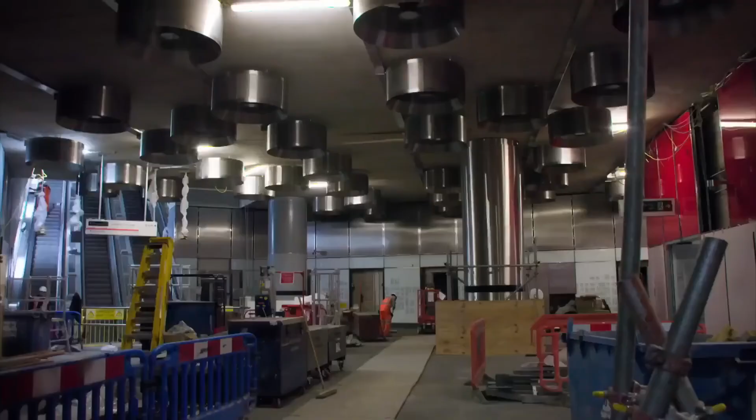Under the heart of central London, this team of technicians is getting ready to undertake a critical test. I'll be up as soon as I can. They plan to power up, for the very first time, the biggest station on the brand new Elizabeth Line railway that is being built beneath the city. This is an enormous milestone, and a huge amount of work has gone into making this happen. With the £15 billion railway already behind schedule, they need this test to run without a hitch.

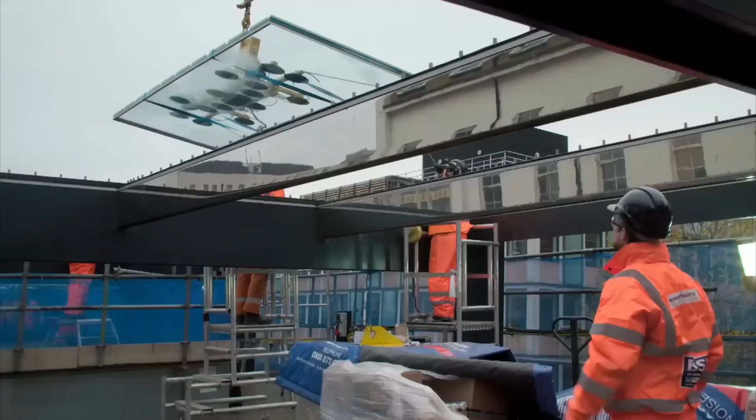Switching now. 3, 2, 1. Now, with mounting construction delays having postponed the railway's launch by almost a year to autumn 2019. We don't need these problems right now. We follow the teams working on borrowed time to complete its next phase. We've got an incredibly tight deadline to work to. Fitting out the stations.

If you damage a listed building, it could be up to a prison sentence. Powering up the line. No power, no trains, nothing. And it's an absolute intense battle to get this over the line. Oh my God. This is the exclusive next chapter of the race to build London's the Elizabeth Line, formerly known as Crossrail.

Hi, Simon. Hi, Leeling. How are you doing? Really good to see you. Thank you for coming round.

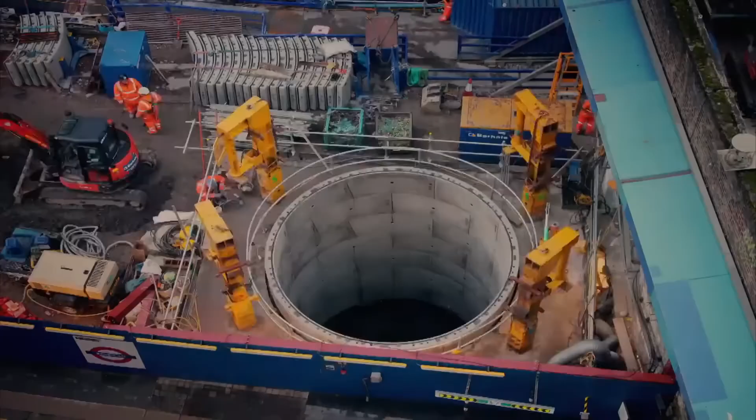How's it going? The Elizabeth Line is the biggest construction project in Europe and London's first new underground railway for 20 years. We've got the last 5% of install to be done, and that's really complicated. Yeah. Nice and steady, inches at a time, please, mate. But after 9 years of construction, the project is in trouble. Just 14 weeks before passenger services were due to begin in December 2018, its engineers were forced to postpone the line's opening by almost a year.

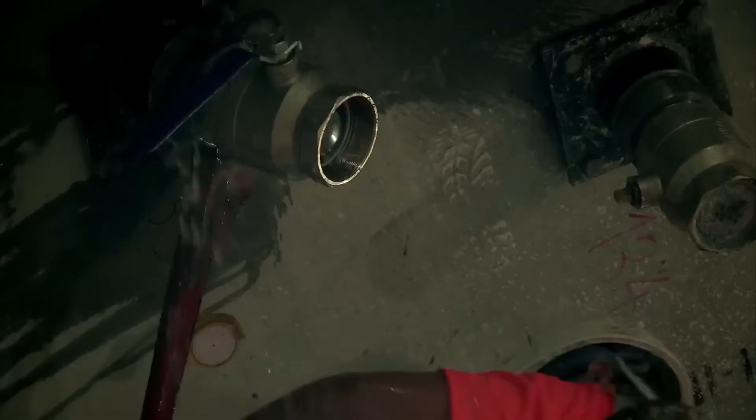Welcome to our westbound. With the new opening deadline now set for autumn 2019, Crossrail CEO Simon Wright faces an ambitious challenge to get Britain's embattled flagship engineering project back on track, to prevent further delays and limit costs from spiralling out of control. You can imagine we've been working extremely hard, 24/7 literally, to reach that opening date, and so it was, you know, enormous disappointment. Any sort of leaks? We do have a leak.

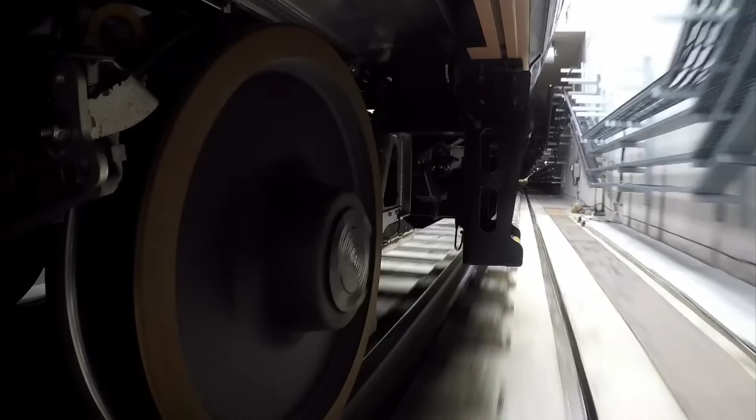The delay was caused by several factors. We've had delays finishing off the stations with mechanical and electrical systems. These are ridiculously complicated, aren't they? Oh, yes. We were trying to test with incomplete infrastructure. We ultimately found that there was not sufficient time left to do all the testing of the trains to prove that it was safe and that the trains would also be reliable. We've got to deliver and regain that trust and regain those reputations that were so hard won over so many years.

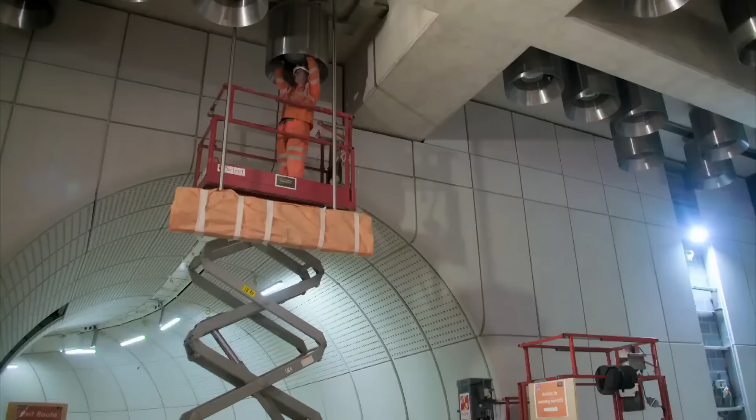To hit their new opening deadline, workers urgently need to complete fitting out the railway. This involves installing the signalling systems, lighting, platform cladding, escalators, and signage, so that technicians can finish testing the trains at high speeds along the full 120-kilometre length of the railway. A single day of additional delay could add up to around £3 million to the cost of the project.

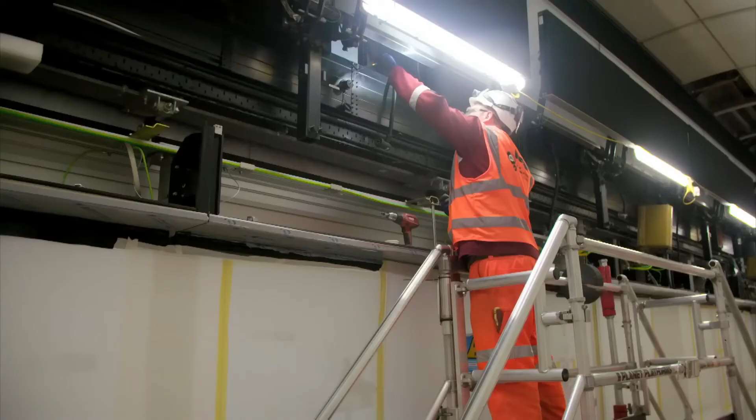Tottenham Court Road is one of the 10 new stations where construction work should already have been finished. Crossrail engineers are working flat out to install one critical element to prepare it for passenger services: power. The big challenge now facing engineers is to plug everything in and switch it on. Put the terminations into the assets there. Project manager Li Ling Hai leads construction and fit-out at this station.

When the public come into a station, they probably don't think about everything it took to make sure that that station operates properly. They don't notice any of the mechanical and electrical systems. For example, that the lights are on, that the escalators are running. We don't expect them to see the work that goes on, but all that work is incredibly important.

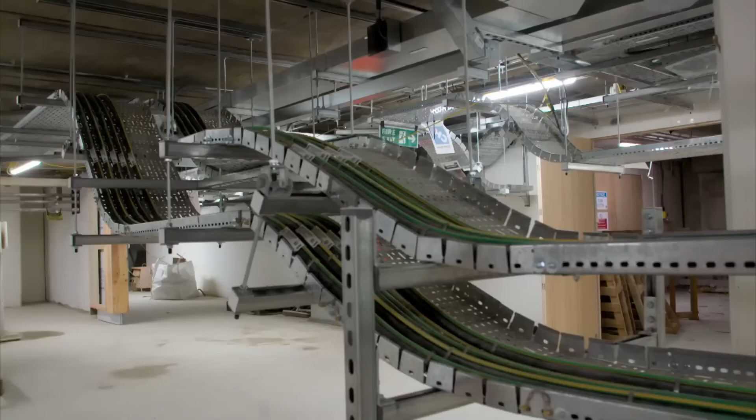It will take approximately 160 megawatts of electricity to run the new Elizabeth line and its stations. Tottenham Court Road Station requires a lot of power to run. It's about the same amount of power that you would provide to about 6,000 to 8,000 homes.

The first electrified London Underground line opened in 1890. The railway stretched 5 kilometres and linked South London to the city. To wire the line up, workers had to pull copper cables through the train tunnels by hand and plug them into a huge generating station. Incredibly, the same strenuous technique is still used today to connect up the even bigger and more complex stations on the Elizabeth line.

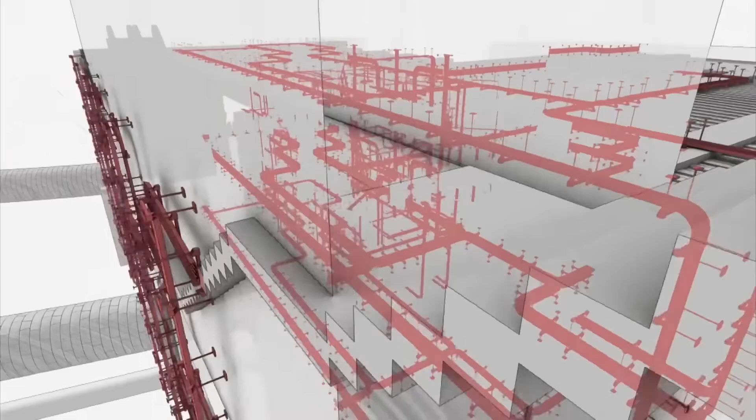Tottenham Court Road Station has more than 100 kilometres of cable, and each one of those cables needs to be fed by hand. No cables, no equipment, no station. Li Ling's team need to thread an intricate network of more than 100 kilometres of cable inside the new Tottenham Court Road station. These will power everything from ticket machines and gates to the lifts and escalators.

But with the station almost built, pulling so many cables through this labyrinth of walls, tunnels and ceiling cavities will be a challenging feat. The longest and heaviest of all the cables is the main power supply line. This vital artery powers the station's ventilation systems. Engineers must weave this 2-ton cable by hand, right through the station, down through 3 floors, and into the main switchboard room where it will need plugging in. The slightest snag or kink in the cable could sever one of its wires and trigger even more delays to the railway's opening.

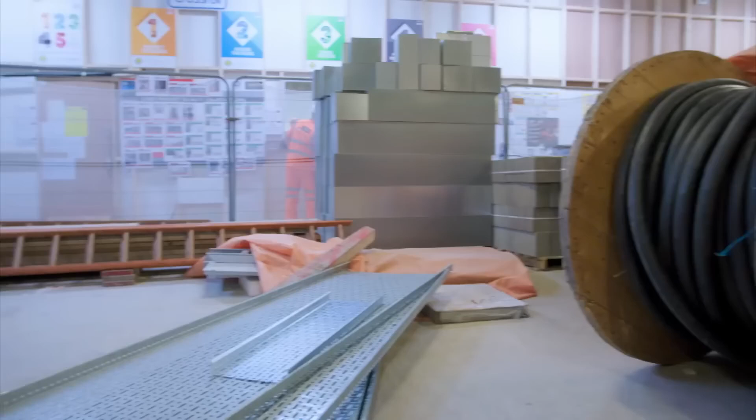Cable pulling can be really physical because while some cables are very thin and the size of your bootlace, other cables are huge, fat cables that require large amounts of physical labour. Oh, Manjit, how's that scaffold going? It rests on the shoulders of East End electrician Sean Thompson to wrangle this heavy hauling feat. Right, Bill, Mark. When we get down to -4, I'll have a look.

I've been an electrician for 22 years now. From when I was young, I remember my mum was still just, if you've got a trade behind you, you're always going to have a job, really. Sean's been working on Crossrail for more than 4 years. Crossrail, second to none. We worked on Heathrow Terminal 2. That was similar, but no, nothing like this.

Today, we're pulling in the biggest and heaviest cable that we're using on this project. This is one of the longest runs. It's about 93 metres, which might not sound that long, but the complexity of the run and all that means it's not the easiest to do. It's 18 kilograms every metre, so not easy to shift. Hauling this 2-ton cable over the distance a sprinter would race will take some Olympian strength.

They've got 5 boys in today from Hartlepool. They're all big and strong. I think they breed them big there. One of them soon is the size of a door. Most cable pullers are from Hartlepool, yeah. We don't use cable pullers from London because they're all soft.

Morning, lads. It's a 185 we're pulling in today, so it's going to be challenging. It's a very important cable, lads, so can't have any nicks on it or nothing like that. I really don't want to be taking this one back out again, and neither do you. Sean's team will need more than brute strength to guide this heavy-duty 93-metre-long cable through the maze of walls, cavities and shafts that lie ahead. Their secret weapon? This steel guide sock that grips the front end of the cable so they don't lose it in the walls.

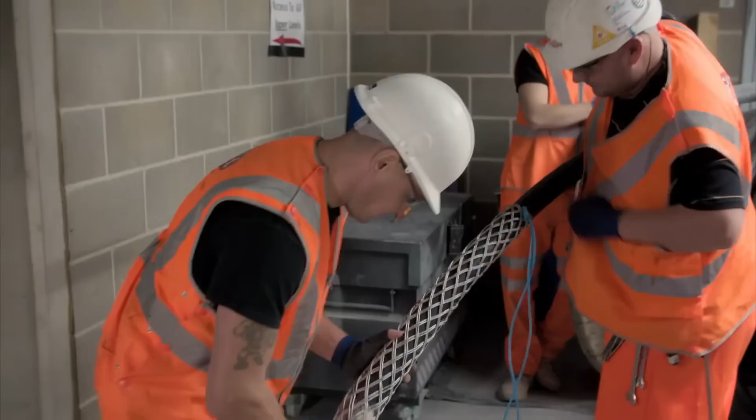Best description of it is like a Chinese finger trap. The harder you pull, the more it contracts on that cable, so it won't ever come off. Ready? Hold. Again. Hold. Hold. The team position themselves evenly along the length of the cable and call a unique chant to help pull in unison.

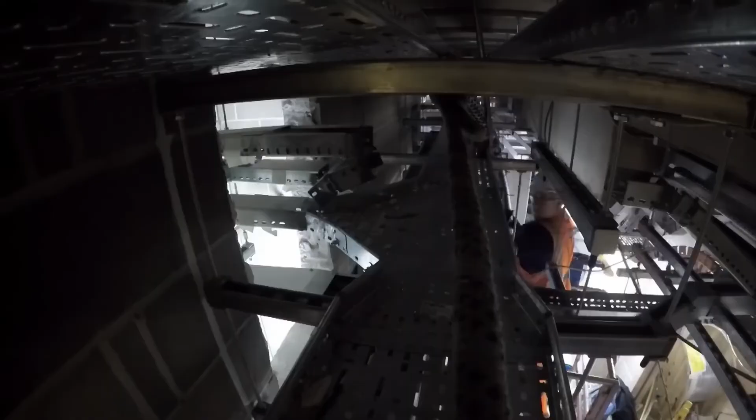It's a cable puller's call. We call it a mating call. They all have to pull in unison. He calls out, they all know to pull at exactly the same time. If you pull at the wrong time, people stand back and all that. It's very important in what they do. The actual call itself, I don't think they've changed it since they started pulling cables way back in Victorian times.

With the cable just 6 meters into the 93-meter pull, they hit a snag. Not going, not going. Looks like the cable's got stuck in the corner. Just too tight up there. Just fingers crossed now, getting it around this corner. A metal bar is blocking the path of the cable. Just pulling against this bar all the time.

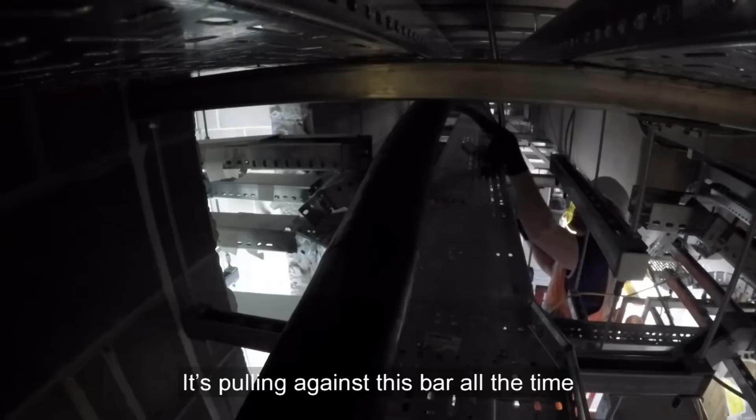That was like a break. It's challenging places, but some places it opens up and it's easier. What's up there? Nightmare. They move the metal bar out of the way and heave again. There you go. Up.

But it's not long before they hit the next pinch point, a 3-story tall shaft that leads directly into the switch room. It's not coming down, that, mate. It looks good on paper, then when you try and put some big cables to it, obviously it doesn't work. You have a nightmare. The cable's got stuck again, and I think the lads are getting quite frustrated about it now.

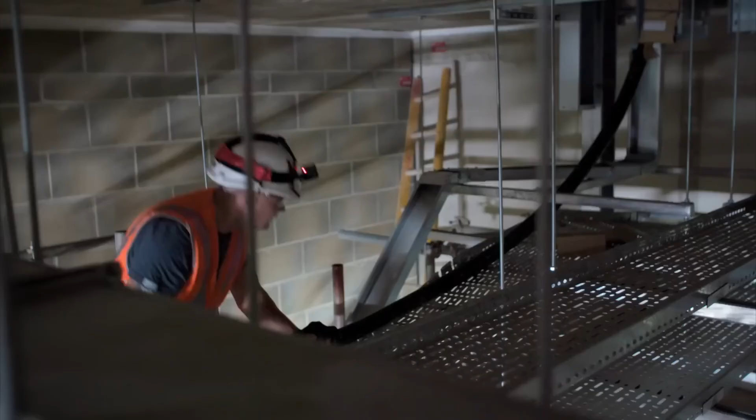Two stops west, the countdown clock is ticking for workers to finish one of the most ambitious new stations on this section of the line. It will allow Elizabeth Line trains to plug directly into Isambard Kingdom Brunel's iconic Victorian terminus at Paddington. 35 million passengers use this station every year to connect to mainline, underground and airport trains.

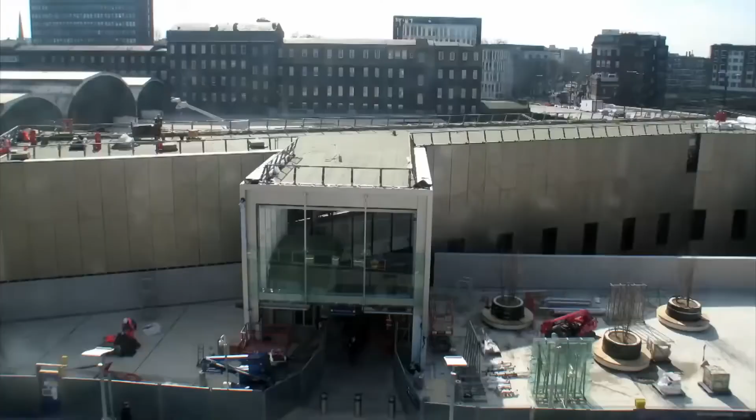6 years ago, the new station here was little more than a hole in the ground, held open by 1,000-ton steel supports. Today, its ticket hall is lined with ornate bricks, and a new additional entrance has been built to welcome its 70,000 passengers a day. Once complete, this will be the most significant transformation to Paddington for over a century.

The construction work here is causing huge disruptions for local businesses, with a year-long delay to the line's completion set to cause even more misery. The problem is all the main entrance of the station has been closed. Many people cannot come in and visit us because it's a long walk. We had to find different ways to survive. We start serving breakfasts in order to pay the bills and to pay our staff. Otherwise, we just go bust and that's it, finished.

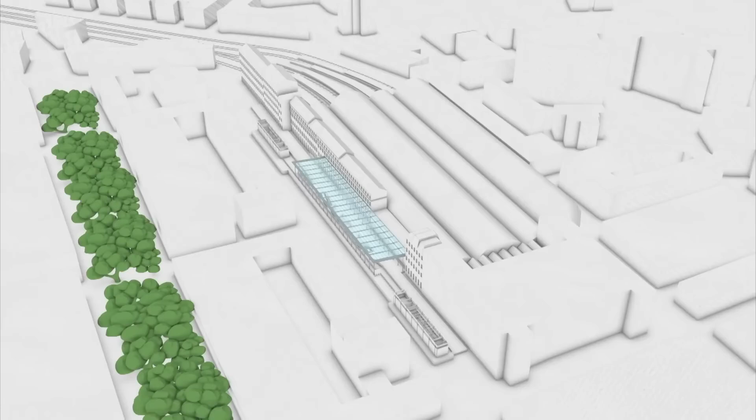But hopefully when this thing is concluded, maybe we have more customers. We've got businesses around us to keep happy. We've got a lot of work ahead of us to get it all complete. To end disruption and finish the new station here, Cynthia's team must now top out the construction with a great glass canopy. It will stretch 120 meters long and 18 meters wide.

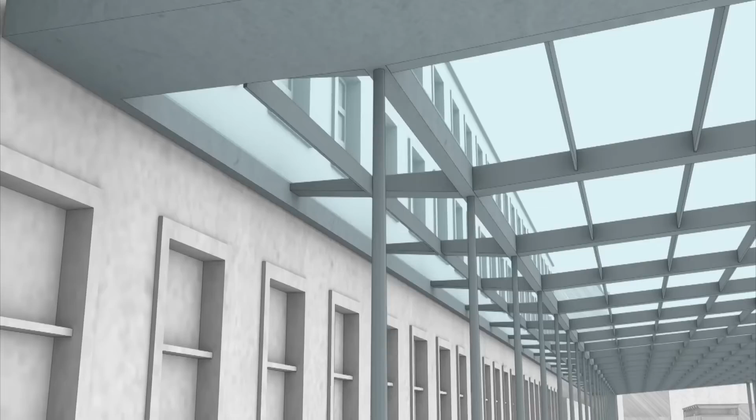340 tons of prefabricated stainless steel columns and beams make up the canopy structure. 220 one-ton panes of triple glazed glass slot inside the frames. These will allow light to flow uninterrupted right down to the platform level. To make the construction work even tougher, workers must erect this 4,000-piece steel structure just 4 inches away from Macmillan House, a Grade 1 listed building. A single scratch or knock could incur heavy penalties on the team.

If you damage a listed building, it could be up to a prison sentence, so we don't want any damage to the building next to us. This is the most constricted site I've been on. You all know why we're here today. The first column's being installed for the canopy. When the loads are coming over, don't want anyone anywhere near it. You know, don't go underneath it, keep well out of the way until it's safely in the hole.

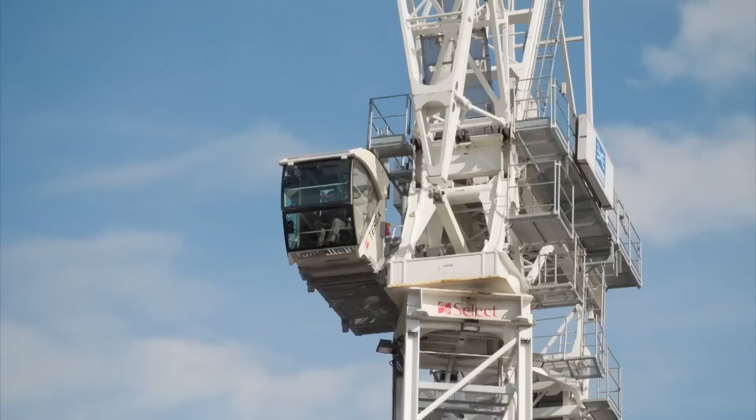Jib down a bit more for me, please, Leighton. When you're lifting, you think everything can go wrong. You're only as good as your last lift, because your next lift could be an accident, near miss, fatal. So if you think of the worst, you count for everything. Go up nice and slow, please, mate. Are you ready up on top? I'm ready, yeah. It's on its way to you. The crane operator and ground team must remain focused. Going up nice and easy for me, Leighton. Any lapse in concentration and the column could hit passing traffic or crash into scaffolding, taking the entire deck with it.

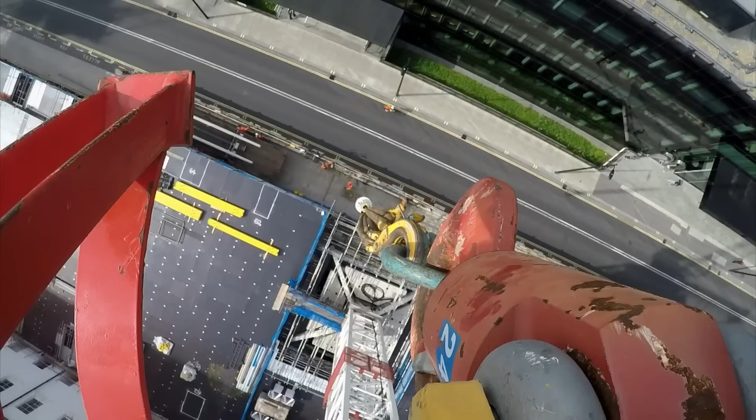Slew round to your left a bit so Flonnie can get that tagline, please. Lovely, the tagline is with me now. Keep coming to them. Keep coming. Keep coming down. Nice and clear. Keep coming down as you were. Nice and slow.

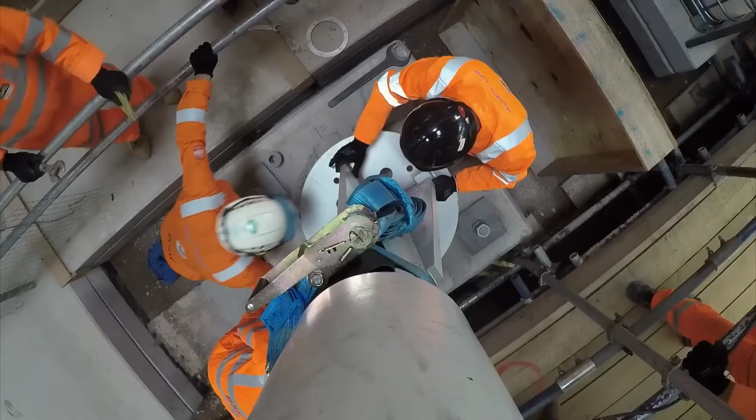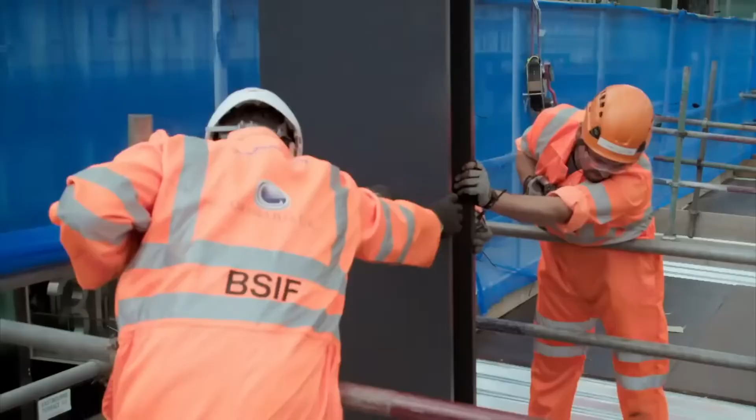All stop, all stop. Now they have the first 6 columns in place. Swinging in this 22-meter-long rafter will take nerves of steel. Installing the rafter up against Macmillan House, we have about 4 inches, roughly. It's a tricky installation. OK, Leighton. Nice and slow for me, mate. Oh, well. Let's just hope it fits.

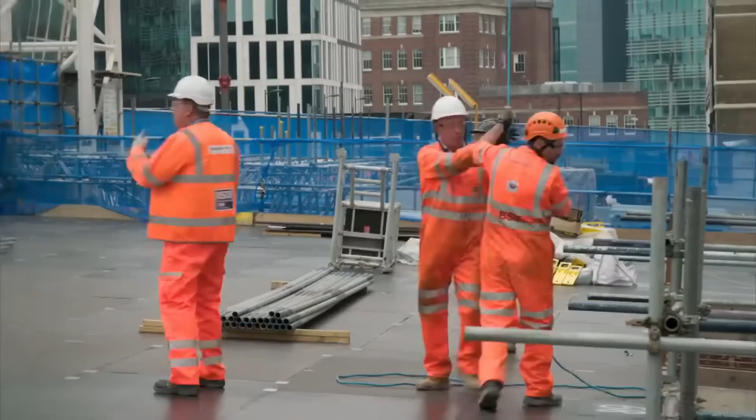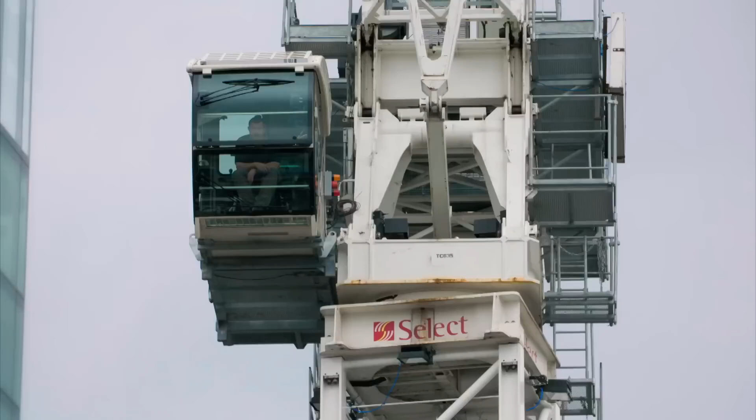Nice and easy. Nice and easy, mate. Oh my gosh, it's close. Oh. Yeah, pretty tight. It's in. The rafter's looking good now for welding, so should be good to tack it in place. He went very well. Fabulous crane driver up there. And he has what I call touch of an angel. Everyone's got a bit of a sense of relief now that the first rafters are in. Now just another 20 more rafters to go.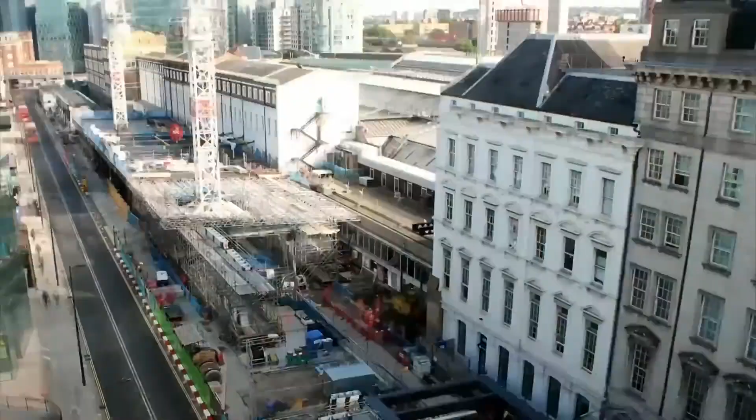With 130 more tons of steelwork and the glass roof to install, Cynthia's team must work around the clock to stand a fighting chance of completing the canopy in time for the railway to open. One stop east is Bond Street, London's luxury quarter. This playground for the rich and famous is home to Europe's most expensive shopping street, attracting 200 million visitors each year. The new station here will be a vital gateway to the area, expecting over 130,000 passengers every day.

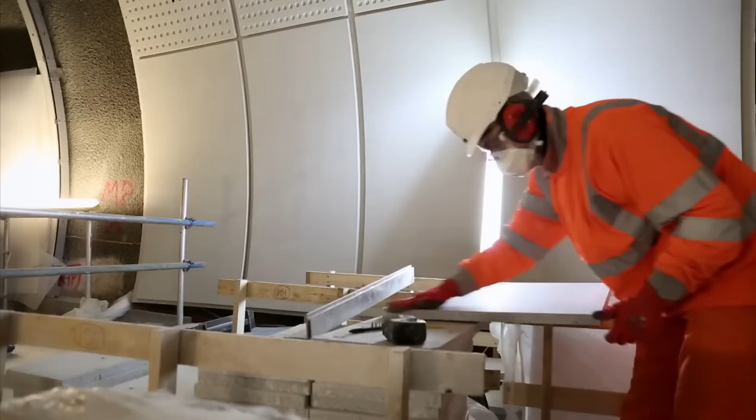Work began on this site in 2010. Engineers excavated 302,000 tons of earth to make space for the underground station and poured 100,000 tons of concrete to line the walls for its ticket halls. Today, most of the flooring, wall cladding and lighting may be installed. But construction work here is running up to 6 months behind schedule. And there's one crucial piece of machinery that's still missing. The station's escalators.

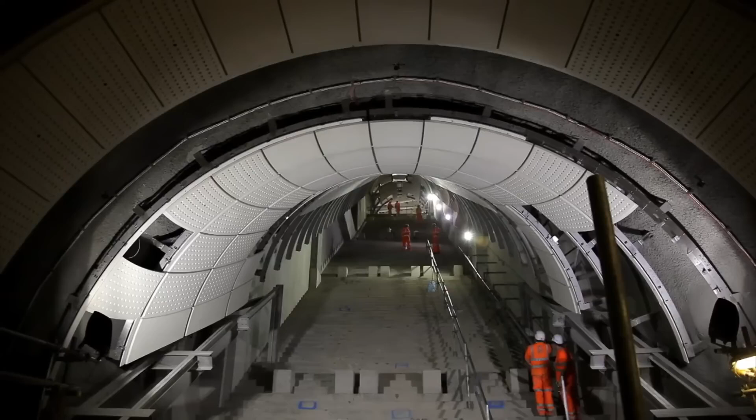Ollie, Megan, call back. Ollie. 30-year-old Australian engineer Tim Wean is supervising the installation of 3 huge escalators into this station to connect the entrance at road level down to the platforms. Spanning 65 meters, these escalators will be the longest on the Elizabeth line. It's mind-blowing, the size and the scale of the project. I guess because of the size, it brings up a lot of challenges.

I've always sort of had a passion for engineering and construction, even since I was a little kid playing with Lego and sand in the backyard. So to be here is a little bit of a dream come true, really. It's Europe's largest infrastructure project, and it's great to be a part of it. The escalators are an essential tool to maintain the steady flow of people through stations.

The first escalator on the London Underground opened in 1911 at Earl's Court Station. It was made of wood and powered by an electric motor. The novel contraption attracted 18,000 people eager to try it out on its first day. Even though dresses were torn and fingers pinched, it proved an instant success. Thousands of people will be using these escalators every day. Without the escalators, there'd be no station.

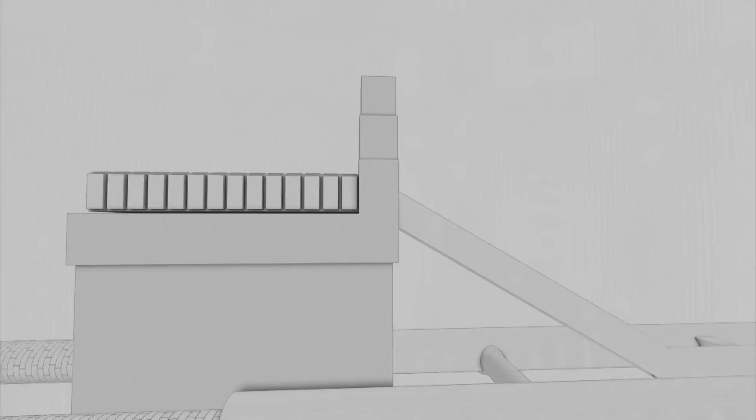The 3 escalators at Bond Street will connect the Eastern Ticket Hall at street level to the train platforms 28 meters underground. Installing them will be a formidable challenge. Each escalator is 65 meters long. Too long to slide into place in a single piece without hitting the ticket hall roof. So Tim's team planned to separate each escalator into 13 pieces. The smallest section will be 5 meters long, but still weigh 2 tons.

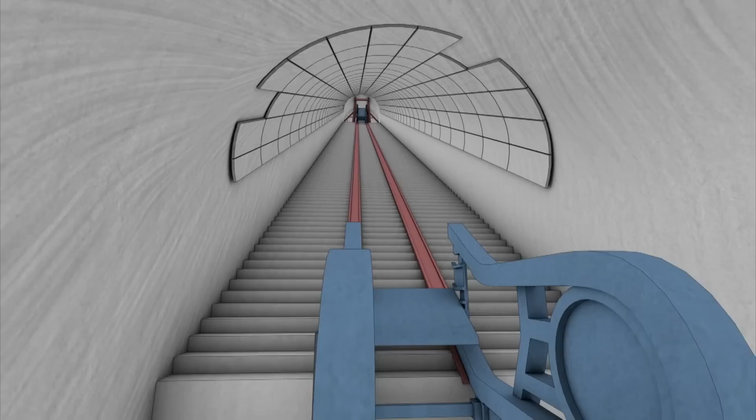The team must carefully winch each section down a 30-degree angle incline, lined with steps on a set of tracks like a roller coaster. It will take great skill and coordination to control these unwieldy pieces of metal as they lower them down this passageway into place. So one of the biggest challenges we've got here at Bond Street is getting the escalators to site. They're trucked from the factory through the heart of London, and they need to arrive on time, ready for us to install.

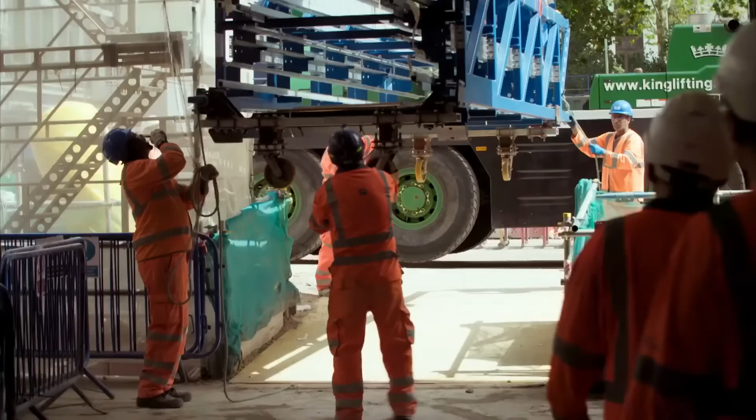Tim's worksite is hemmed in by luxury apartments and boutique businesses. It's taken the team 9 months to plan the complex logistics of this operation. But the constant stream of monster deliveries like this is a relentless nightmare for this area's discerning residents. The day-to-day problems are lorries coming along and closing the road off, stopping parking outside, just the dust and the pollution from it all, the noise. Hello? Obviously, that kind of disruption is not cool if you're trying to do someone's hair and they're trying to relax. What are we doing?

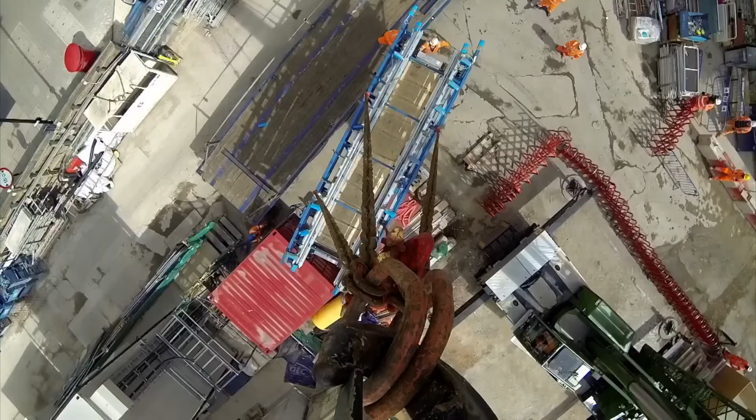A lot of work goes on behind the scenes to ensure we're minimising any disruptions to our neighbours. So this goes in the building first? Huge moment for the team to see the first escalator arrive. It's all systems go now.

They're on wheels, but they're still 7+ tonnes, so they are movable, but they're very heavy, and it takes a lot of guys to manoeuvre them. A full escalator is 13 truss units, and we can fit 12 in this ticket hall at any one time due to the space. If there is a glitch and we're not installing at the rate we need to, we'll have to turn the trusses away, which will ultimately delay station opening. So, mammoth task ahead of us.

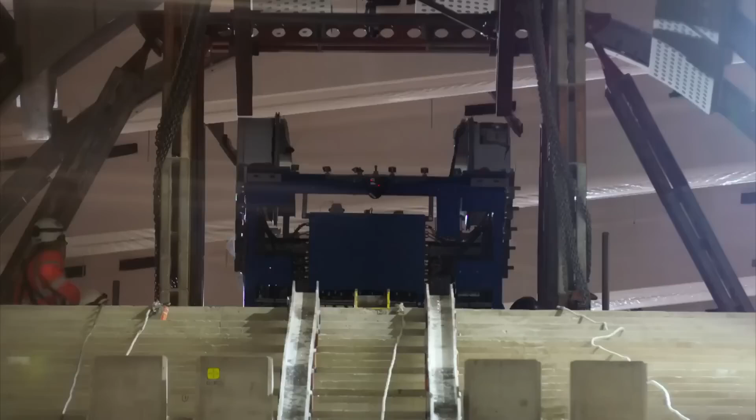The first section is generally the hardest because A, it's the heaviest, and B, it's got the longest distance to travel. So that one section needs to travel from top to bottom, and once that section's in, the rest should just fall into place. That's the rocket, yeah. Walk in. Right. You all right there, boys? You're all clear. Out you go.

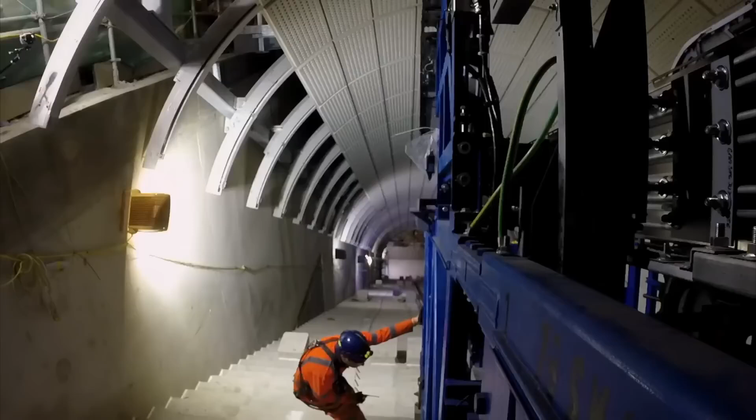This winch cable is all that stops the first 7-ton escalator section from sliding out of control as they attempt to abseil it over the edge and down the steep incline of steps. It's a heavy piece of gear. There's a lot of weight on it. Just as they get going, the wheels jam in the tracks. Yeah, the wheels need to be a bit tight.

The guys have to make sure the wheels are straight and sort of jostle the wheels into position and make sure they're running straight down the track. Balancing on the steep slope of steps, they wrestle the wheels back on track. And get the escalator moving again. Good, yeah? Yeah. The first truss section is about halfway down now. A few hiccups at the top, but hopefully it's smooth sailing from here on to the bottom.

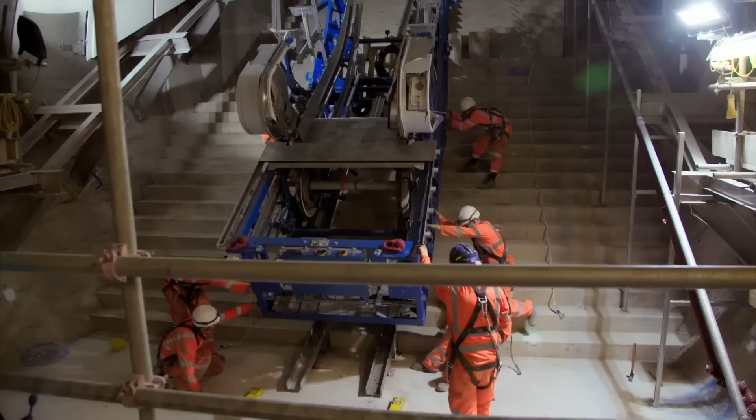Good news, the first escalator truss has reached the bottom. It's very satisfying to see this progress. It's been years in the planning, so very satisfying to see the first section in. But as Tim's team hoist the second piece down into position, they hit another glitch. The second section has come in, and for whatever reason, it's not aligning properly. Nowhere near it. We don't need these problems right now. Yeah, it's still quite far. I think we will have to take this on.

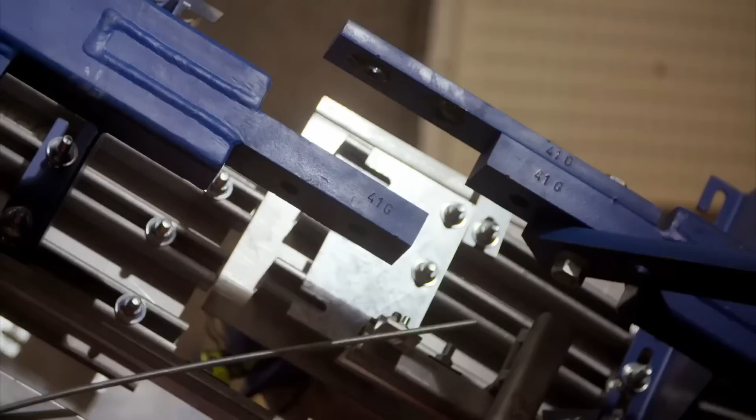The issue we've got is these escalators were designed and built over a year ago. Between that time and now, we've had to alter this floor level to suit some drainage, which has meant that the first and the second truss sections don't align. Guys will have to jack this section up another few hundred mil, and they weigh 7 tonne each section, so it's going to be quite difficult to lift them up and to do these alterations. This is also going to add some time that we don't have.

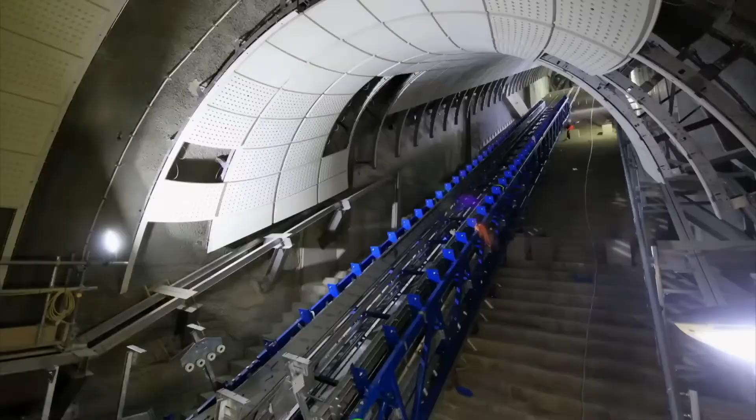Yeah, all clear. Inch down. And again. That's it. Lovely. We managed to get the two sections together. There's a lot of blood, sweat and tears, but happy days it's in. Now we've got the remaining 11 sections to go in, and hopefully we can claw back the lost time. Tim's team now need to push through the night to get the escalator assembly back on track.

East at Tottenham Court Road Station. Obviously, we can get access and get this cable out the way on -1. Sean and the team are battling to thread a crucial 93-metre-long power cable through the maze-like station. They've hauled the 2-ton cable down 3 floors, but now it's jammed on the corner of the shaft that leads into the station's switch room. Just above the tray, you've only got like that much clearance. And it's just like wedging against everything up here.

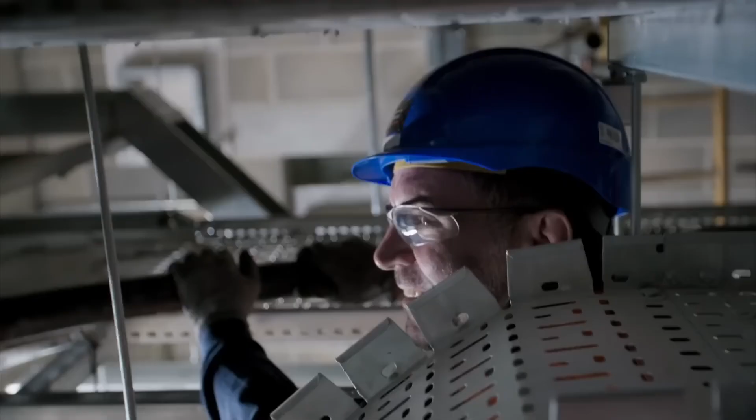The team squeeze a roller underneath the cable to help ease it round the corner. Try again. These corners. Oh, that's better. To make up for lost time, Sean rolls up his sleeves to haul with Big Al and the boys from Hartlepool. They're always getting me to do this. Just helping out a little bit, made it a bit easier for them. I'm out of breath.

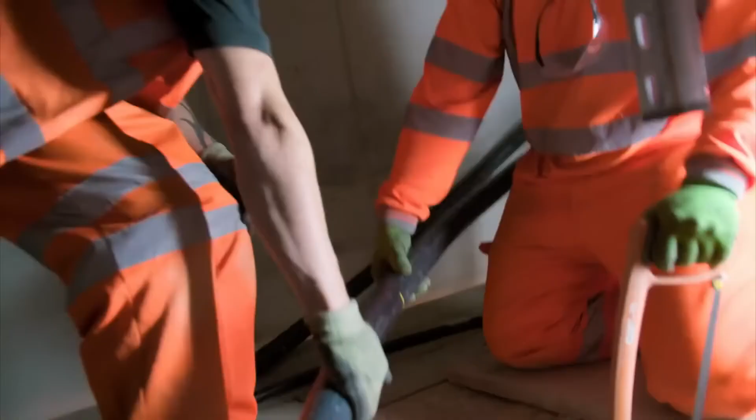That's it down here! With the cable end finally in the switch room, it's time to plug it in. To do this, they must slice through the cable's outer casing to expose the inner wires. It's the moment of truth for the team. If they cut the cable too short, or any of the 148 wires inside are damaged, they must rip the whole cable out and start again, which could further delay the beginning of passenger services.

Hopefully it's been measured perfectly. If it isn't, obviously, the cable's coming back out. It's very much like a surgical procedure. Can't cut too deep. Obviously, can't cut too shallow. Has to be bang on. There's absolutely no room for error. It's obviously a very tense moment for me and the lads because this is the biggest cable that we're pulling in. It really has to be right.

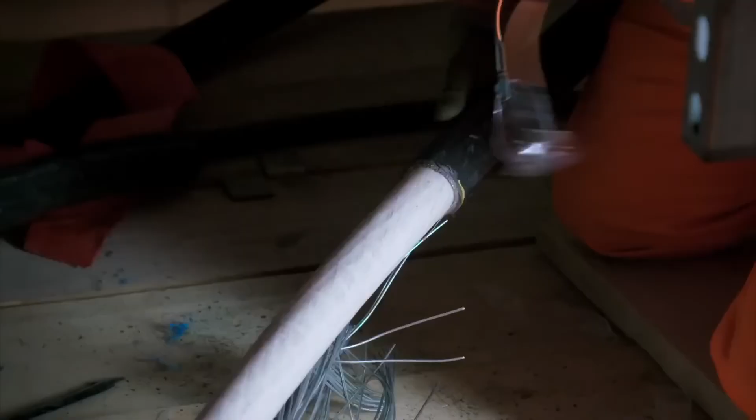Yeah, a bit of a moment of truth now. Everything's bang on there. The cut's good. Obviously, won't be completely relaxed until it's in the top of the panel. I know it's long enough. Right, hold. Hold that. How's it going, mate? Going all right, looking good up there. That's it. Perfect, mate. Well done. It's gone in like a dream.

With the cable firmly in place, they can plug the wires into the switchboard. But they'll only know for sure if their extreme wiring is flawless when they turn on the station's power switch. You sometimes expect a few little mishaps, but the lads have done a blinding day. Got a few more cables to put away here, and then it'll be ready for the big switch on. Won't be no bangs, hopefully.

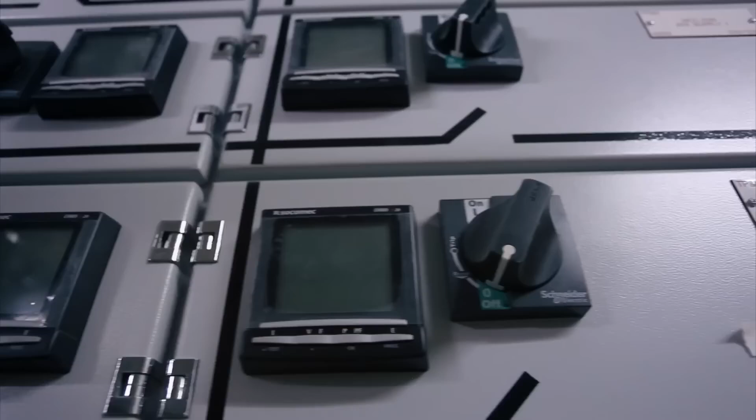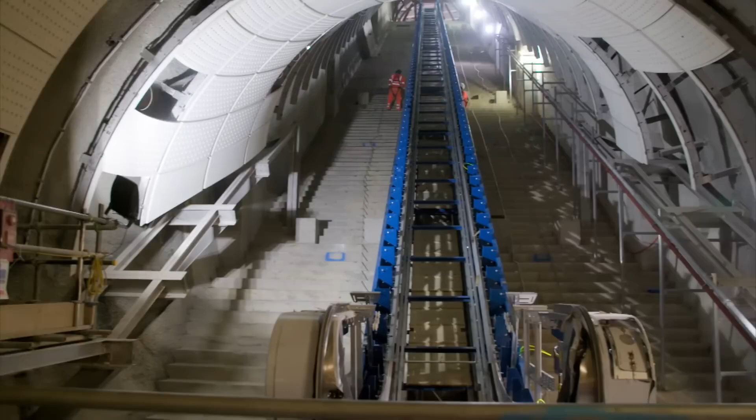At Bond Street, Tim's team have been working night and day to assemble the first 65-metre escalator. The first escalator's been installed, and luckily it fits. It's very satisfying to see the first full complete escalator in. But this is just the initial stage of this colossal installation job. The next step of the process is the slide, which opens up new challenges. Tim's team now has 2 more escalators to squeeze into this steep, narrow passageway.

To make space for escalator number 2, they need to connect winches to the top and bottom of the first escalator and slide it to one side, inch by inch. But this won't be easy. If they slide one end of the 45-ton escalator faster than the other, the extreme stress could bend or break its frame. The key to this successful slide is making sure everyone's on the same page, the top crew in constant communication with the bottom crew, making sure that we're sliding in unison. Sonny, are you ready? All good, boss, all good. We're about to start now. 1, 2, 3.

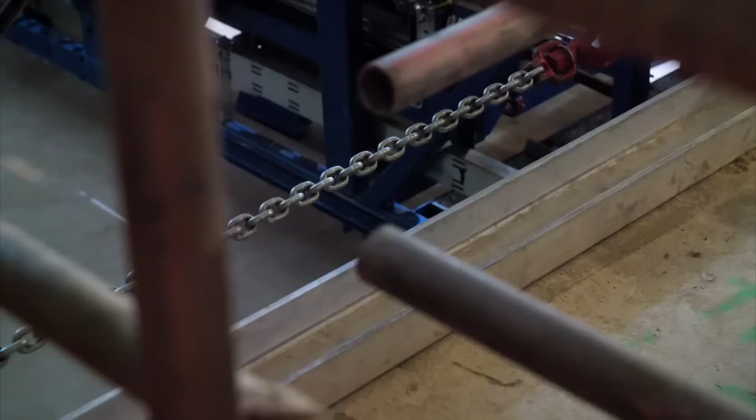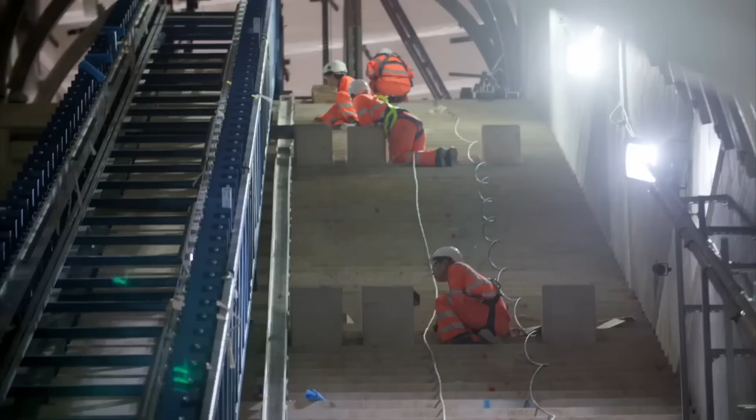As the escalator inches to one side, it veers off course. It's not straight. Stop, stop, stop. You've cleared the bottom track. It's like the top hasn't moved. The issue we've got is the top's not sliding as fast as the bottom. So the risk there is the escalator can twist and it can also catch on the top or the bottom concrete walls. The escalator's 65 metres long and we're dealing with millimetre clearances, literally 1 to 2 mil here and there, so it is very tight.

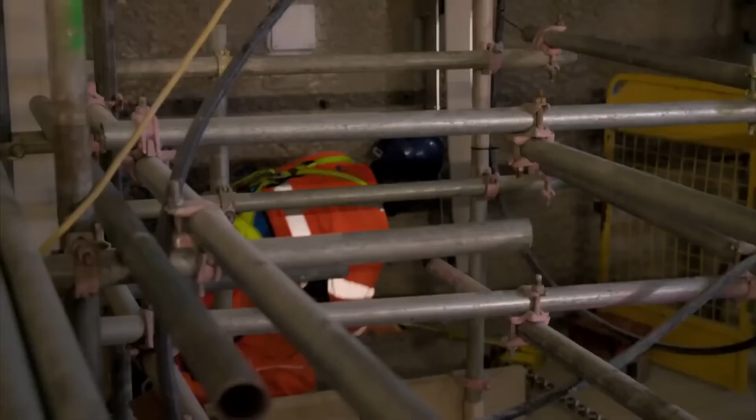The pressure is on the team at the top to haul this 45-ton giant back into line. We've had the bottom team stop their winching while the top team winch a couple of extra notches and catch up to the bottom team. A bit more, please, a bit more. Keep going, Dylan. That's it, like that. Yeah, it looks about right, that. We're back on track now, straight. Right, okay, we're going again then. 1, 2, 3. With the escalator back on course, the team crank it up a notch.

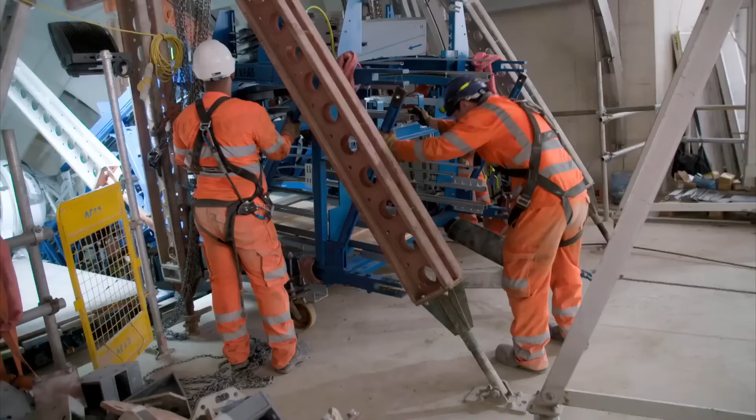Had a few issues along the way, but all in all, it went quite well. Yeah, very happy. It takes Tim's team 6 days and a painstaking amount of muscle power to slot the remaining 2 super long escalators into position. I'm going down. Over there. But the final piece of this mechanical monster will be the trickiest to fit. It's the hardest piece because it's one of the heaviest, and it's a different installation method for this last piece.

Right, is this the wrong stairs? Go forward a bit. Forward, forward. It's not the longest section, but it is the heaviest section. The last section of the escalators contains all the motors and also the drive shaft or the cog that controls the steps. The process of installing the escalator is probably the same as what they would have done years ago. There's no fancy machinery or anything, it's all winches, hoists and manpower.

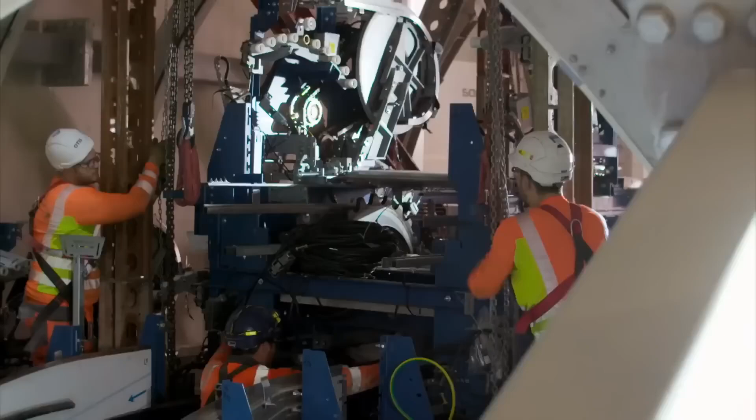All together, down. We've got literally 10 millimetres of clearance between the previous section of escalator and the concrete wall. So it's going to be tight. Keep an eye on the back, yeah, make sure nothing gets caught. Keep it all together, all together.

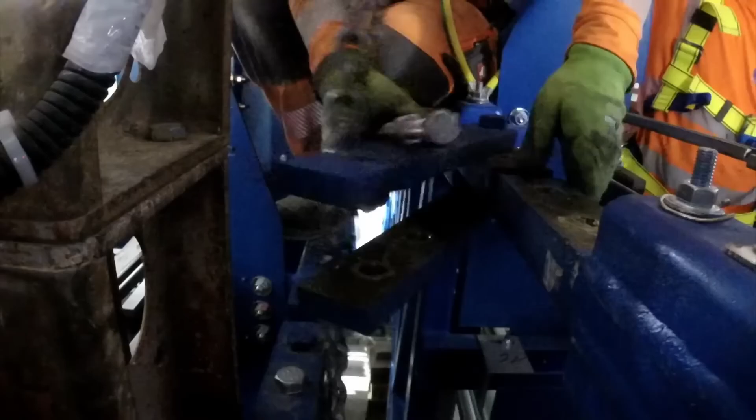With just millimetres to spare, the team squeeze... Almost there, almost there... and bolt the last section into position. Well done, boys. Beautiful. Good job. Very rewarding to see the last section going.

It takes Tim's team a further 12 weeks to install all of the escalator's 771 steps. Bond Street Station may now be closer to completion, but with the flooring, ticket halls and train platforms still unfinished, it remains a long way from being able to welcome its first commuters.

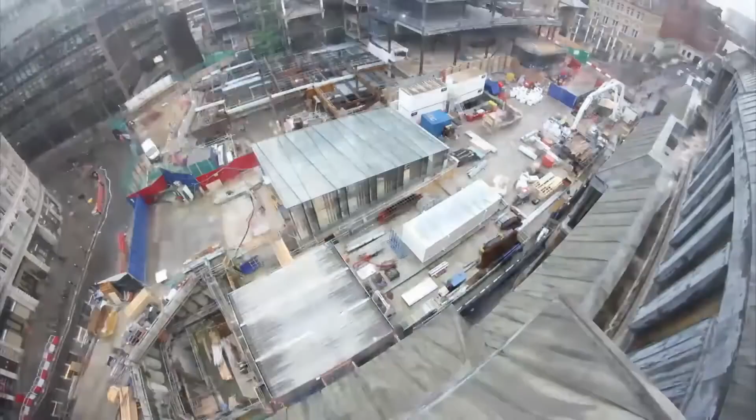Across London, teams are working on borrowed time to finish fitting out the Elizabeth Line stations. It's starting to look increasingly difficult to hit the new opening deadline of autumn 2019. In the tunnels, technicians are battling to complete more than 600 train tests through the railway's underground route. Danny O'Connell leads the team from this secure control centre.

So we have the status of the OHD, gents, please. We have various systems that we need to test. One key component is the signalling. We also test the communications, platform screen doors, power. So it's quite comprehensive, the amount of tests that we need to do.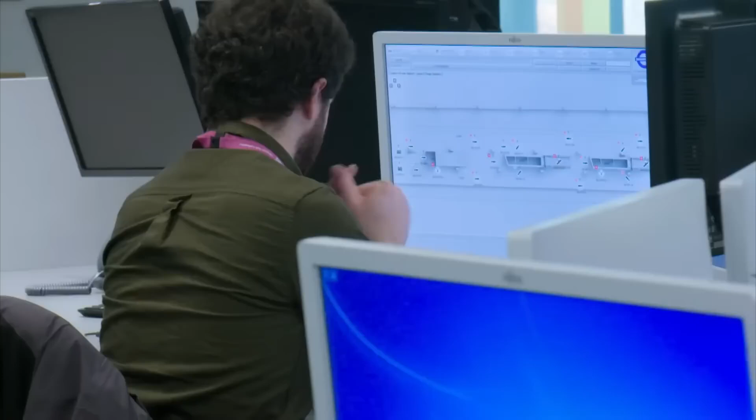The delay to the railway's opening date has given Danny's team more time to run these tests. But with construction work still a long way off being finished, his team is still limited to just a single 48-hour window every 2 weeks, where workers must down tools and clear the tracks to allow the test trains through. A 48-hour window every 2 weeks is a logistical nightmare.

Because these test windows currently are quite short, we need to try to maximise the testing that we do in each test window. Brendan, we just need a confirmation that the route's going to be set from Abbey Wood to Canary Wharf. These test runs include navigating a single train, east or westbound through the underground tunnels, at low speeds of around 5 miles per hour, stopping at one station after another.

Some test windows we complete in 2 or 4 tests. Other test windows, it's maybe 20 to 25. The fundamental system for us is the signalling system. 75% of our tests are based around the signalling system.

With less than a year to go until the railway is due to open in autumn 2019, there are still hundreds more test runs to complete. And these tests will need to gradually increase in complexity. At rush hour, Elizabeth Line operators must be able to smoothly run 24 trains an hour, travelling 2.5 minutes apart through the tunnels to shuttle busy commuters between stations.

But right now, the team has only been able to run one single train at a time through the tunnels. Danny's team have their work cut out to reach the ambitious deadline. Even though the launch date has been pushed back, the pressure's still on us to deliver this railway. Once up and running, it is predicted that Elizabeth Line trains will transport up to 500,000 passengers every day.

310 drivers are being recruited for the new line. That's going to help you. You're going to learn through other people's experiences as well as your own. Rochelle is 30 weeks into the intensive driver training course. Having passed a series of simulated and real train manoeuvres... go gently up onto the train and we'll couple up in the train in front of us... today she faces her biggest challenge to date. Taking one of the new Elizabeth Line trains on a special overground run, carrying passengers.

I kept waking up a few times in the night, not the best night's sleep. I think it was more nerves than anything else. Starting at Shenfield, Rochelle must guide the train 32 kilometres west on a mainline route that runs into the heart of the city and terminates at Liverpool Street Station. There will be up to 1,300 passengers on board, 73 signals, and 16 speed restrictions to navigate. A huge test for Rochelle.

I will have passengers on board the train, so that's where the nerves are going to kick in. Oh, it's a horrible day. Miserable. This is the train to Liverpool Street. Let's do it. Let's get up to 60.

First test, the first station stop. Rochelle must bring the train to a precise halt at a special marker, so all doors of the 160-metre-long train open onto the platform. Give it about 50% now if you want. We'll just bring it down a little bit and we'll just try and roll. You just see my stop car mark coming up. So let it come to a stand and then full brakes.

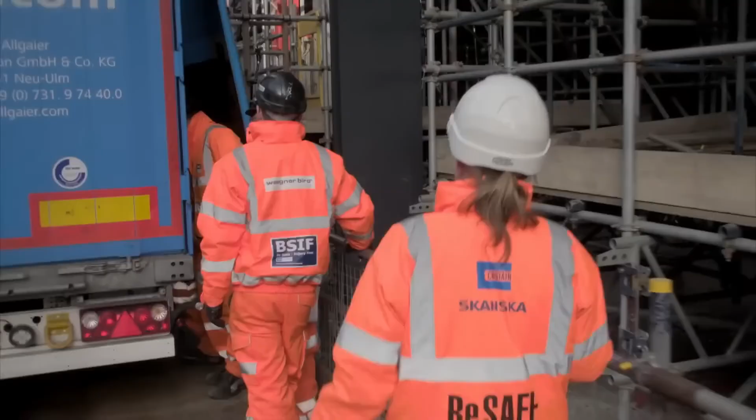West at Paddington, it's taken Cynthia's team 10 weeks to assemble the intricate 4,000 steel pieces that make up the frame of the Elizabeth line's new station canopy roof. Starting to look a bit like a canopy. No, it's okay, stop, it's okay. Is it looking all right? Now they face an even more precarious challenge. It's a very exciting day here on site. We're just hoping that the wind doesn't pick up too much, so we'll be able to lift the glass in.

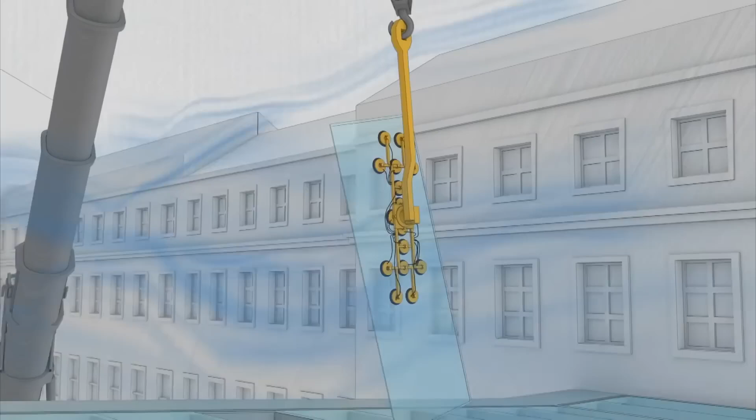Cynthia's team must now carefully install 220 panes of bespoke glass into the steel frame. Each triple glazed sheet weighs a ton and costs around £5,000. The team must use a suction-powered vacuum lifter to hoist every pane into position. They need perfect weather conditions for this plan to succeed. A drop of rain will cause suction to fail, while a gust of wind will toss the pane around like a kite. They must watch each sheet of glass like hawks to stand a chance of installing them all without a hitch, so this station can open on time.

To make the task even more demanding, the team must fit each pane in exactly the right position so that the completed glass jigsaw reveals a cloud-inspired image, one of London's largest ever pieces of art. Every piece of glass is unique because of the artwork that's printed on them. So you could say it's like a giant jigsaw puzzle. They all need to be installed in the right order, in the right place. If one was to break, we'd have to order that specific glass again and then obviously wait a number of weeks for it. Let's hope we get some good weather.

Just as they prepare to lift the first sheet into place, high winds halt work. Oh man, it's definitely picked up. No, there's no way they can control that glass in that. Ian, do you know if the wind's okay or not? One minute we're getting 18 kilometres an hour. Next minute it's 32, so it's up and down at the moment. Oh, okay. It's still okay. It's not blowing over constantly, so yeah. I'm not writing it off yet.

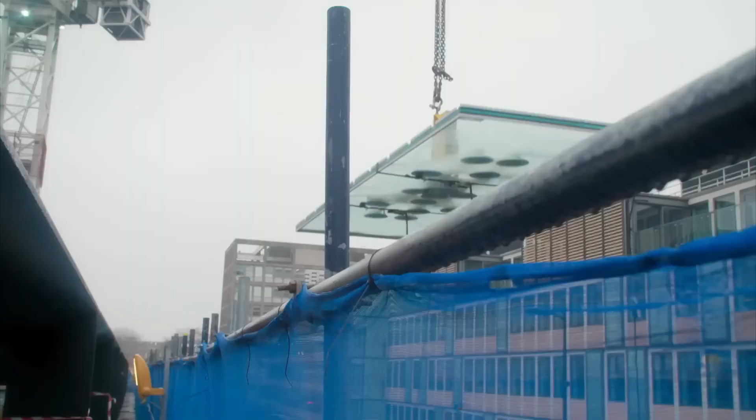Sensing a slight lull in the wind, the team seize the moment. Okay, guys? Okay? Hoist up a bit, nice and easy. They rotate the panel horizontally to reduce the surface area that could be caught by gusts. Up in 3. It takes formidable hand-eye coordination to keep the glass steady in the wind. Which way is it going?

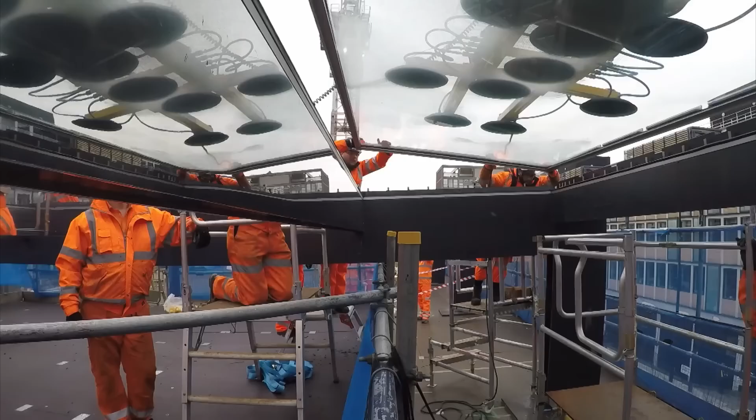Keep coming down, man. Keep it coming down. Finish what? Come down. Oh! Keep coming. Keep it coming. There's more. Okay?

Good job. Good job. First piece of glass is now in place, so yeah, smiles all around now. There's 220 panes of glass altogether, so we've got a lot of work ahead of us. All right, fellas? Over the following weeks, it's looking good. Okay, hold the height now, hold the height.

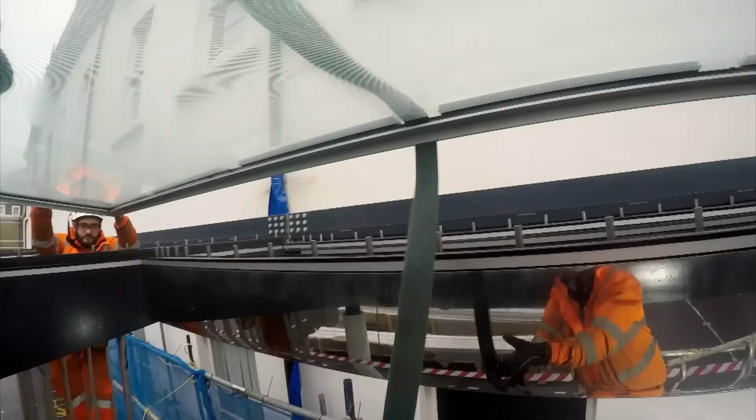Cynthia's team wage a relentless battle against the elements. We're very close to the scaffold level. To install the remaining panels in Paddington's great glass canopy. It's looking good, buddy, it's looking good. You can just start seeing the corner of the canopy just peeking out over there. It is very exciting.

Looks so much bigger than it does on drawings. I think people's first impressions are going to be wow and be really impressed with the sheer size. I'm definitely going to make everyone I know come and visit this and have a look at the canopy.

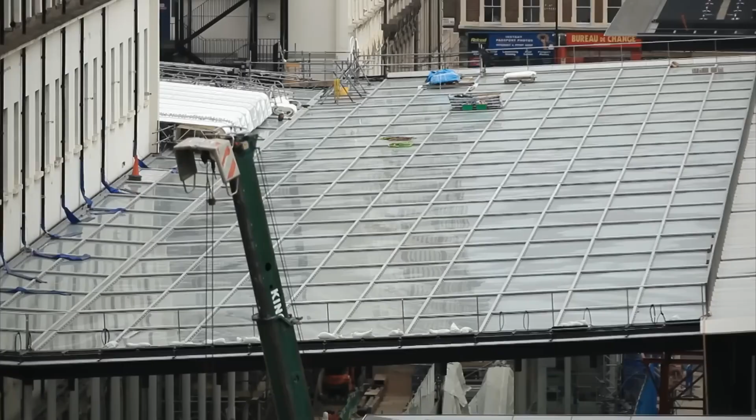Two stops east at Tottenham Court Road, it's a critical moment for Li Ling and Sean as they prepare to switch on the station's permanent power source for the very first time. Permanent power comes with a whole network behind it. If one power supply fails, you've got a backup supply. The whole thing has been set up so that the Elizabeth line should never be without power and can always operate safely.

Big day today, because we're going to be bringing the station to life. It's a culmination of all the work that's been put in by all the electricians. This station will consume enough electricity to power a small town. The team must perform vital safety checks before the big switch on. We've done the protection settings on that side. Right, okay, let's proceed with switching on. We're going to remove the isolation safety lock.

Winding this panel into the switchboard plugs the whole station into the 400-volt power supply. It's like a plug at home. It's on a much, much grander scale. Now for the moment of truth. Switching now. For Sean and the Tottenham Court Road electricians, 4 years hard work comes down to the press of a button. 1. Voltage on all 3 phases, normal.

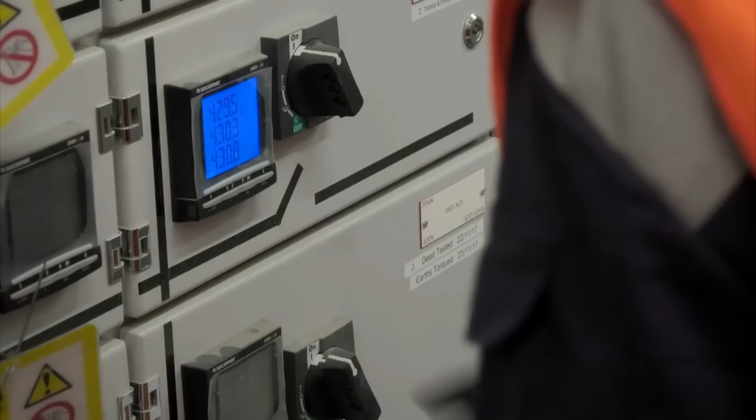Oh, mate, you nailed it. Oh, I was nervous. Yeah, I'm extremely happy. Not just happy for myself, happy for the whole team. All good? All good, done deal. Happy days? Yeah. This is a huge milestone to know that we're now using the Elizabeth line's permanent power, and it's another significant step towards finishing. But it's like running a massive race. We can see the finishing posts, but there's a lot to do before we get to the end.

Crossrail announced that they are unlikely to complete the railway in time for its already delayed opening in autumn 2019. The deadline is deemed over-ambitious. They need even more time to finish construction and fully complete testing the trains on the line before the railway can safely open. We need to establish radio comms. If we don't get radio comms, we're going to have to rethink. Over. It's another huge blow for London's commuters.

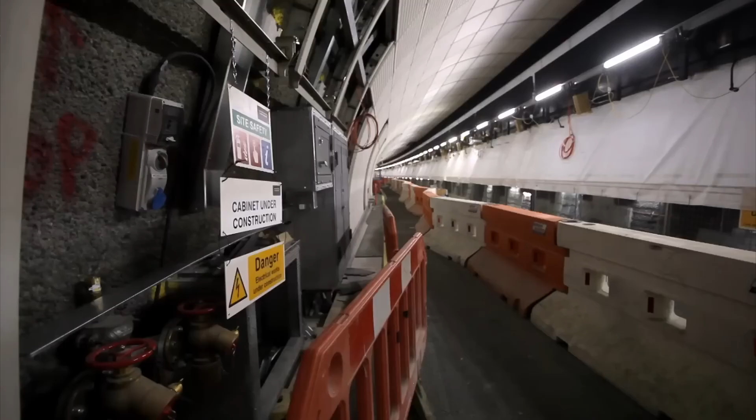Yes, I was very disappointed because it's been going on for such a long time and any delay just prolongs the agony. The protracted delays are expected to add up to a further £2 billion to the £15 billion project. And it could take until 2020 to complete the railway. The extent, both of the time and cost, are pretty jaw-dropping. Yes, again, there's been a delay. It's again, more money's being spent, and that's really unacceptable.

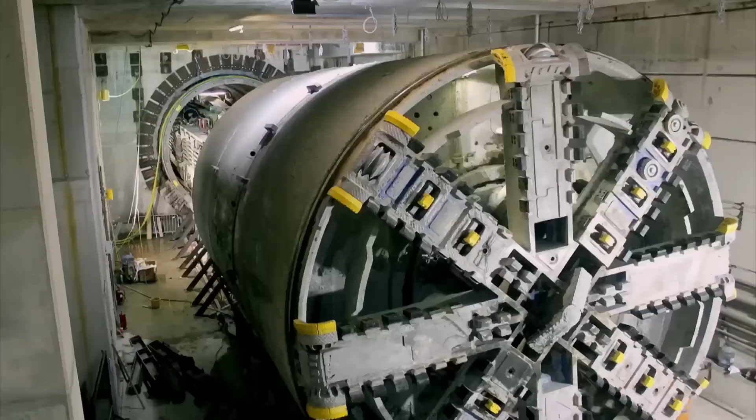There's a lot of work to do before the now £17 billion railway can carry its first passengers, and the reputations of the engineers building it can be restored. In terms of construction, we are probably more than 95% complete. But the last 5% is so much more complicated than the first 95%. This is a mega project, tunnelling through London for the first time in 20 years. It's a massive accomplishment, but the pressure's still on us to deliver. It's about restoring pride for British engineering and getting this railway open to the British public.